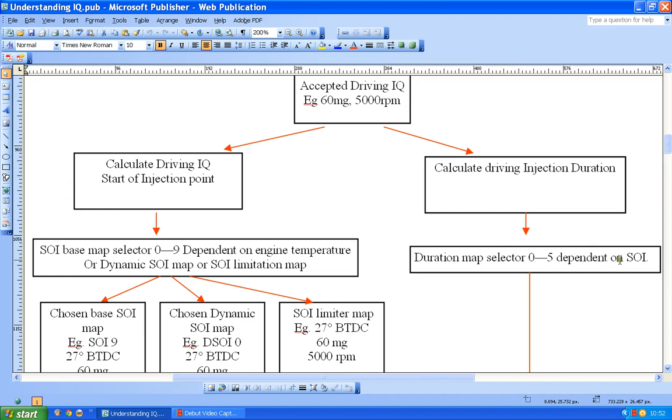Okay, in the last video I just stopped having decided what duration values were going to be. So I decided that 60 milligrams here at 5,000 revs per minute was going to be 44 degrees of duration, and I went down this side. And I also pointed out that I couldn't actually go down this side without getting a value from this side to tell this map selection what to do. So it starts to get more complicated.

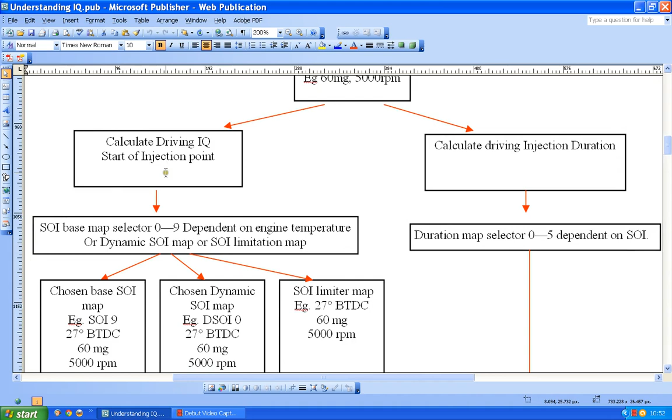Right, so what I would like to do on this side then is pick my SOI, or my start of injection point. Now I've got a set of base maps, usually numbered 0 to 9, and I've got a selector which picks which one of those maps I will be using, so it will pick 0 to 9, and the choice is dependent on engine temperature. So depending on what the current engine temperature is, I will pick either 0, 1, 2, 3 and so on. So I've got 10 maps 0 to 9. Now once the engine's hot, it will be picking 9 anyway.

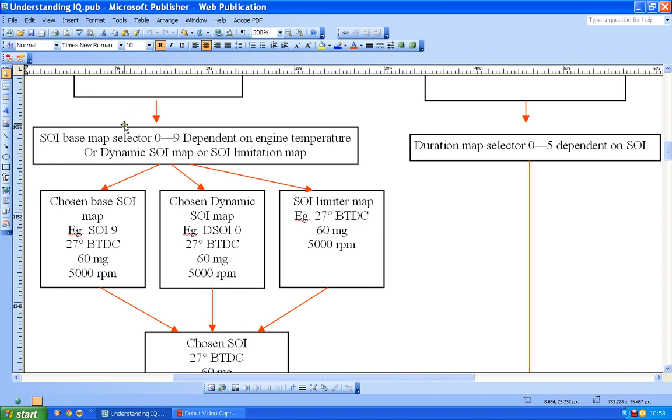So we'll just assume that no one is daft enough to tune their engine when it's cold. So we'll assume that everybody is going to be thinking about 9 anyway. So we've got map 9, and we can pick a value, and then we can use it to select over here, just like we've already said. But it's not quite as simple as that, because if you look at a lot of VAG diesel files, what you find is, yep, here's a choice, 0 to 9, and I've picked 9. But if you look closely, very often there is some other maps known as dynamic maps.

Now these dynamic maps include all of the SOI9 usually, so in other words they are start of injection 9, plus a little bit of dynamic timing, in other words true timing advance that's got nothing to do with duration change. It's simply an advance in timing to give a little bit more power at some point because of the timing in advance, and not because the duration got longer and forced start of injection to start earlier. Now usually with these maps these figures don't change, so in other words this 27 degrees before top dead center that's on that map, the SOI9, would be the same on the dynamic map, because the designers don't normally allow for a possibility of this having dynamic advance at these wide open throttle values.

So these two at this point are very often the same. Now of course that means that whereas this value could have chosen that duration map, it might be this value, whatever value is in here, could be choosing that map. Now and finally, of course, there is a limiter for start of injection, and again it's a sort of a temperature dependent limiter, but we've got a limiter, and that limiter says not so much which of these is okay, because when you look at it, it basically is a choice. So in other words, the result here could be that map, or it could just ignore all the maps and pick a value off of the limiter. So in other words, the value that is chosen could be any of those three.

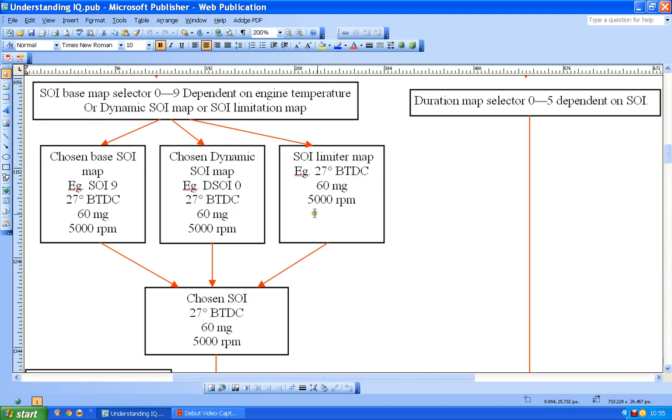And so again, the value that's chosen to select duration could be the value off the limiter, because basically what will be chosen at the end by the ECU is the smallest that is reasonable. So it might be that one, it might be that one, or it might be that one. And there are whole loads of little values buried in these files that the ECU can double check against.

So in other words, there will be values that say when SOI9 can be used, and of course that's usually just the temperature, so it might be something like 80 degrees. But there might be another value buried somewhere that says this map can be used as long as the temperature is above a certain value, and quite often that's not quite as high as this one, or it's the same, but they could be slightly different. And again, the temperatures here should balance against these two, but you have to look at the files to find out.

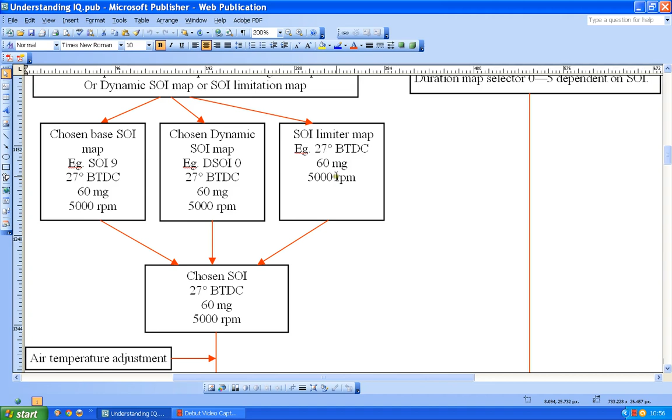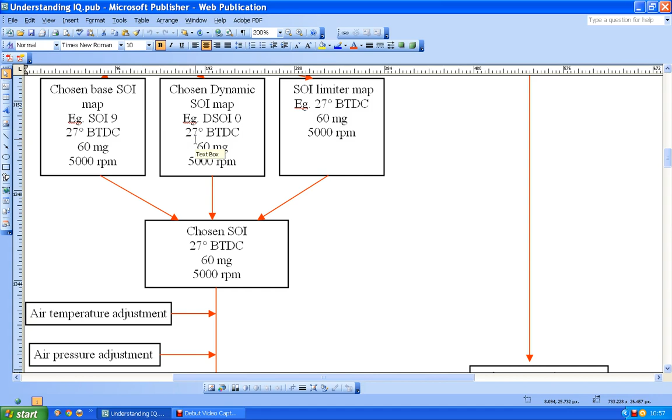But okay, let's say that because we're at wide open throttle, it doesn't actually matter which one of these we've picked, because we've simply picked whichever one is the best value we could get, and it's usually one of these two, because what you often find is that perhaps this one has been set at 30 before top dead center, and if these two are maxed at 27, the ECU is going to pick 27 because it picks the lowest, not the highest. Right, okay, so now we've got a chosen start of injection value.

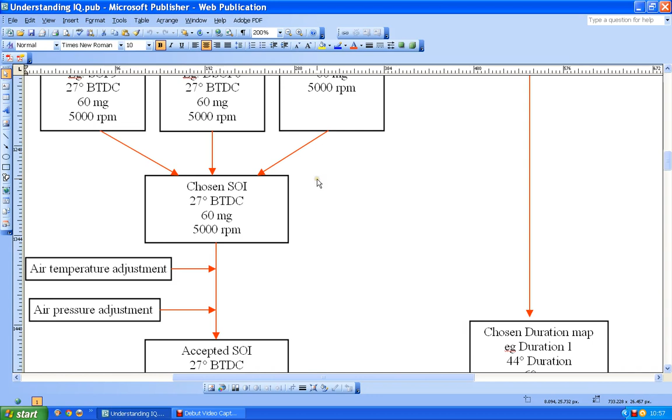That start of injection value will determine which duration map we're using, so that's how that side works, but we've already talked about that. And at this point there are some more adjustments that kick in on some of the files. There might be an air temperature adjustment, and that usually is literally just an adjustment. So it might be either a slight multiplication figure, so a very small multiplication figure, or more often an actual number for SOI that's added on, and it's usually in the order of 1 degree, so we're not talking about huge numbers. So there might be a change of, let's say, an extra added on 1 degree here as a result of air temperature adjustment. Maybe it will be less than 1 degree, or maybe it will be a minus number. And there will be a change as a result of the air temperature there, air pressure here, and finally we will have our value.

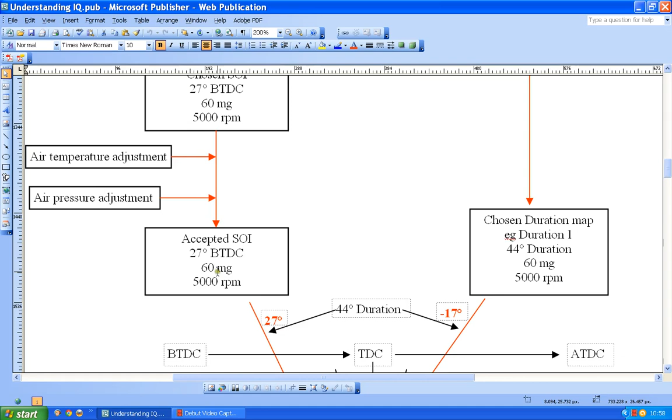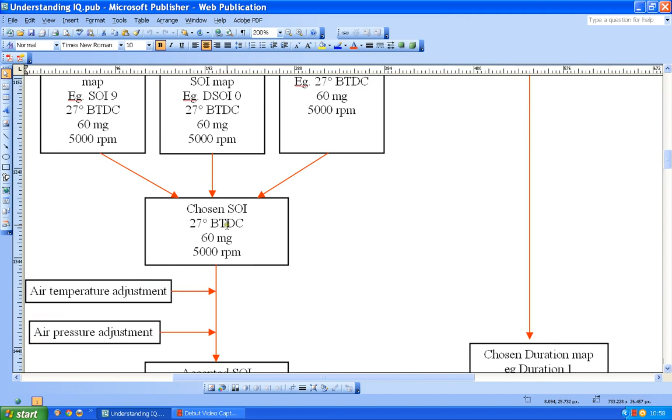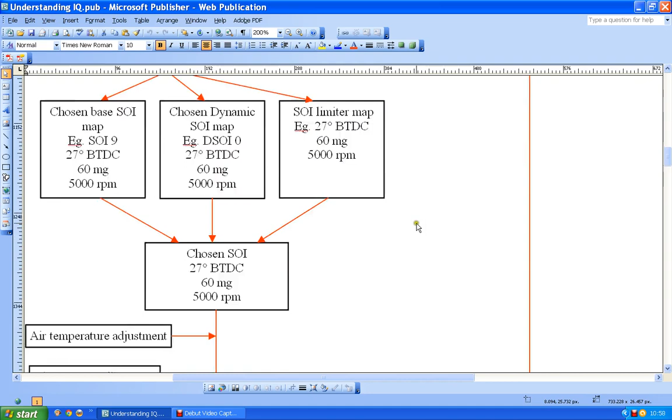Now going back to this selection up here, when that is selected, again, could be here, so it could be there, it could be there, it could be the result of the 3 here, it could be after that adjustment, or it could be after this adjustment, so it's here. So it could be that this final ultimate value is the one that determines what's going on up there. And again, you have to dig pretty hard through a file to find out what is being accepted and what isn't. It's quite difficult sometimes.

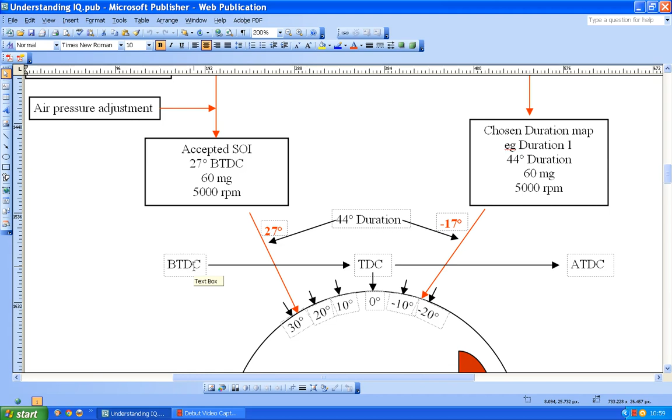Okay, so here we go then. We've got to the point where we've got duration map telling us duration 1, 44 degrees duration, 60 milligrams, 5,000 revs. And at the same revs and the same milligrams, we are going to start injecting at 27 degrees before top dead center. Simple as that, apart from the silly diagram that's underneath. So what I'm going to do is I'm going to stop there, and I'm going to come back to the silly diagram that's underneath and try to explain what the two are doing and how they're interacting with each other.